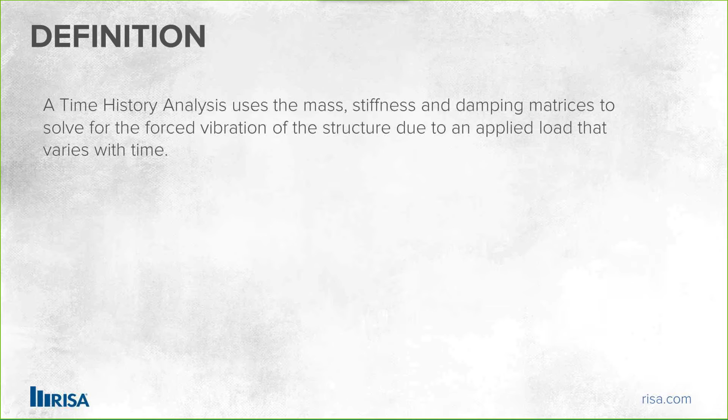It's simple to think about it that way, but as you can see, it'll get pretty complex as we keep going. The examples we're going to be talking about today are two types. One is going to be a dynamic equipment example, such as a turbine. The idea with dynamic equipment is that you've got heavy equipment, and we'll be focusing on the displacement. We're looking at the equipment because it operates at a resonant frequency, so we want to make sure that is not close to the frequency of the structure, so the equipment doesn't malfunction, but also so that the equipment doesn't affect the structure in any way.

We can also think about reciprocating compressors. These are also types of dynamic equipment. And then smaller types of equipment, like an MRI machine. That one would maybe focus on the velocity to ensure that the MRI machine was working properly as the structure responds to it. So there's that type of example. And the main point with these types of examples is that we'll be applying the load to a node or joint. We won't be applying it to all nodes.

In a building structure, you're thinking a little differently, for things like seismic time history. In that case, it will happen to all the nodes for the entire time, so that will be focusing on all joints or nodes in the structure. And when we look at the seismic analysis of the structure, we're going to focus on, does the code check work? Do the detail reports work? Whereas when we're looking at dynamic equipment, we might be looking more at deflections and displacements. The other type of example in the building would be a blast loading example. So I'm going to show you different pieces of this with different examples. We'll focus really in the program so we can see how to use it.

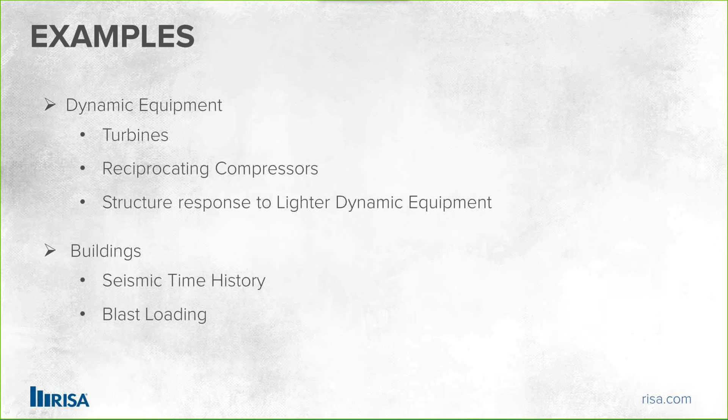So talking about how to use it, it's really easy to apply the time history. There are just some basic steps, and let me outline them now, and then we'll go through these steps one by one. The first thing you want to do is define a time history pattern. We have some predefined patterns in the program, so you don't have just a blank slate. You have some examples, and we also have historical earthquakes that you might want to use. But we also have some quick examples in there for you too.

Once we define the pattern, we'll want to apply those as loads to the structure. As I mentioned, you're going to apply them as an individual load to a joint, or to all joints. So those are the two ways you'd go about doing the loading. Once we've applied the loads, we're going to create load combinations to use these time history loads. They're a new type of load. Just like any other type of load, dead load, live load, we're going to have a time history load. It's an addition to the load combination generator. And for the next step we're going to need to find the natural frequency or fundamental period of the structure. This is the one where I would mention that you should watch the dynamic analysis webinar that I put on, but that one is pretty easy.

We're just going to go through the real basics of trying to find the mode shape of the structure. And then the last final piece here is to run the analysis and review the results. We've got great tools to find the analysis information. We've got some new features that we worked in there to really aid in this feature. So I'll be showing all of that. So let's jump

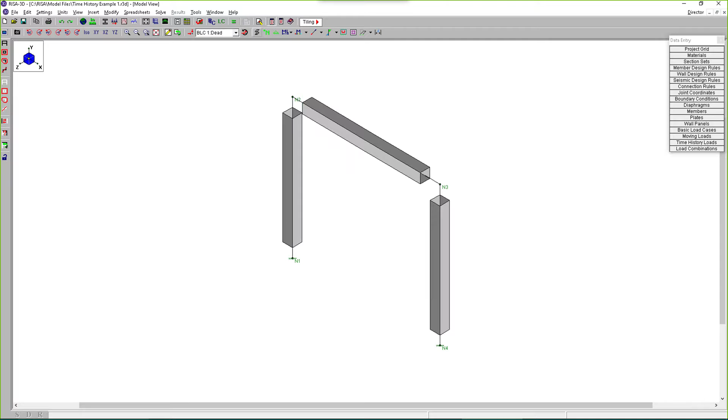I've defined some basic load cases, some self-weight with y -1 for gravity, and I just put a distributed load just to account for maybe some of the tributary dead load or self-weight of the structure that is accounted to this beam up here. But there is already some self-weight for the actual members themselves. That's all that's in this model. You'll see the load combinations just have dead load with a factor of 1. So nothing in the model so far.

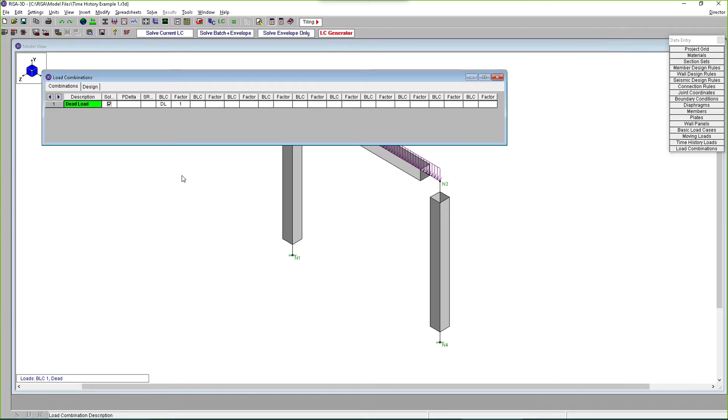What we're going to do here is create a time history function starting out. To do that, you'll see that there's a little icon next to the dynamic icon that says Edit Time History Function Library. You can also go to Modify, and you'll see at the bottom there it says Time History Function Library. You click that. And inside there, you have a laundry list of different ones. I may have a little more than what comes out by default here, but we have a lot in here to start with. So you can take a look around.

Let's just open one just to review what this means. We can either generate one, which we will in a second, but I'm going to view edit just so we know what we're looking at. When I view edit, it opens up an existing one, and it allows me to make changes to it or just take a look. And first thing I can see is it looks very densely packed in here. So this display range helps me target like a plot option, just looking for a small range. So I'm going to go from 0 to 1 second and say apply, and I can see that a little bit clearer.

So that was 10 seconds in total for this whole time history pattern, but I'm going to just look at from 0 to 1 second. I didn't actually shorten it. All I did was change my plot options so I can see the actual pattern better. And what you'll notice, this is time, and then it's plotted over a unitless number here on the left. So we'll determine what this is when we apply the load. This is a sine function, or you can do sine or cosine here from this tool. So there's a couple ways to add, and I will show you how to add a specific.

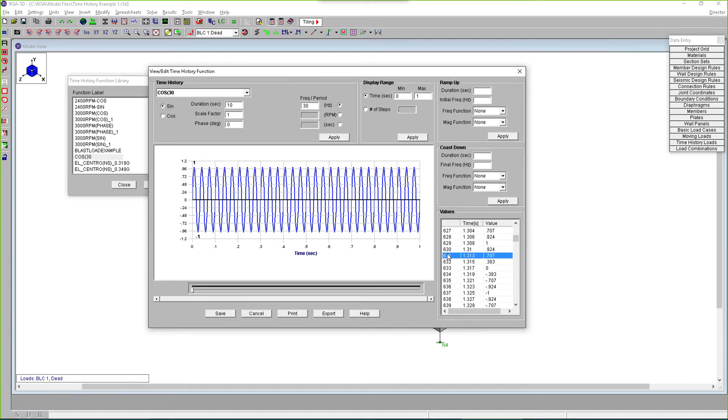You can also print this. If you print this, it'll print out a picture of that function there. You can export it. When you export it, you'll get the values into data for you, so you can actually see what's going on. And the data and the values here, if you scroll down, what you're looking at is steps, then time, and then the value. So I'm going to say cancel on that. And let's create our own for a second here. So just say generate, and I'm going to give it a name.

So we'll call it webinar sine, and I'm going to leave it as sine with a duration, and the duration I'm going to say is going to be 5 seconds, and the scale factor, I'll give that a 1. If you just leave these blank here, this will default to 1, and this will be defaulted to 0. You don't actually need to enter it in. You can tell the program to complete the last cycle, it just finishes off.

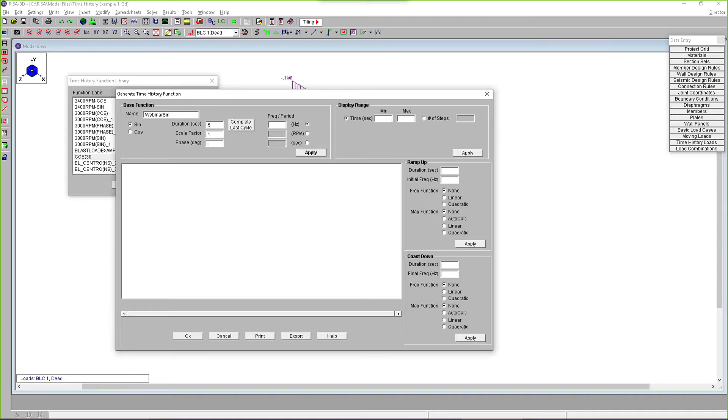I'm going to use RPMs, and I'm going to say 2400. When I say apply, you'll see I get 5 seconds worth of sine curve going through here. It's pretty tight. So if you wanted to really verify that, maybe you go in a little closer, maybe 0 to, let's say, 3 seconds, just so you can see. You can even narrow it down to 1 second just to see that that's happening there. I'm going to go back to 5 seconds just so we see.

Now, the ramp up and coast down, let's apply that so we understand what that is. So typically, if you're in a piece of equipment, it doesn't just start and all of a sudden hit its full speed here. So what we're going to do is we're going to say it takes about 2 seconds for that to actually warm up and get to its full frequency here. And the frequency is going to start at 0. I'm going to say it's going to be the frequency function.

In order to start from 0 to get to its full, it's going to be linear, and you can say apply there. And then it's going to actually go not exactly like this. This is showing us as if the frequency just starts and slowly gets to that. But let's actually think that the magnitude is going to vary also.

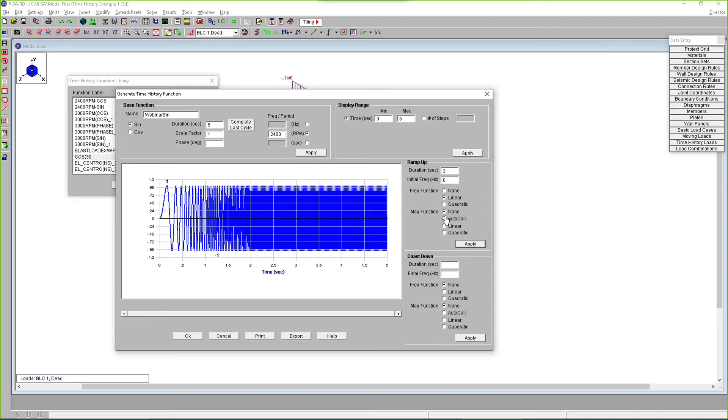You can change that so that it goes to quadratic. If you use the AutoCalc function, that will vary with the square of the function of frequency. So you can use that as well, but it's up to you. You can kind of see what that looks like here. If we use AutoCalc, you'll see it changes a little bit differently, but let's do linear.

So same type of thing for the coast down. So maybe as the piece of equipment shuts down, it doesn't just stop. There's sort of a coasting effect of that. So the same thing we'll do on the back end. So for 2 seconds, and this is just so you see, this is 2 seconds out of my full 5-second duration here. So 5 seconds in total, I didn't get 2 seconds and then another 5. So you want to build that in properly.

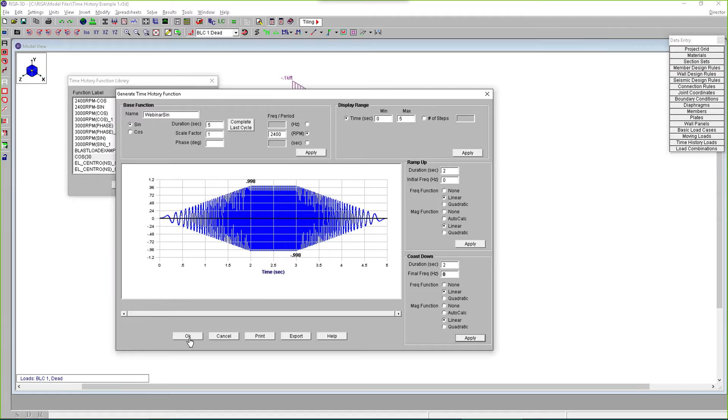And then we'll get to a final frequency of 0, and we'll do this again linear in both ways and apply that. So really my function's only being applied here in full from 2 to 3 seconds, and then it's being turned off. So it's really only running for 1 second at full. So I've got all that in place, and I can just say okay. Now I have a webinar sine listed at the bottom.

In order to create another one, it would be kind of a pain to do that. So what's nice is you can just say create copy, and I'm going to copy this one, and then I'm going to go edit it. So I can just take all of what I just did, just change here. We can see it's webinar sine 2, and this one I'm going to change from a sine to a cosine. And so it'll just be slightly off from what's here. So we're just out of phase with the sine one.

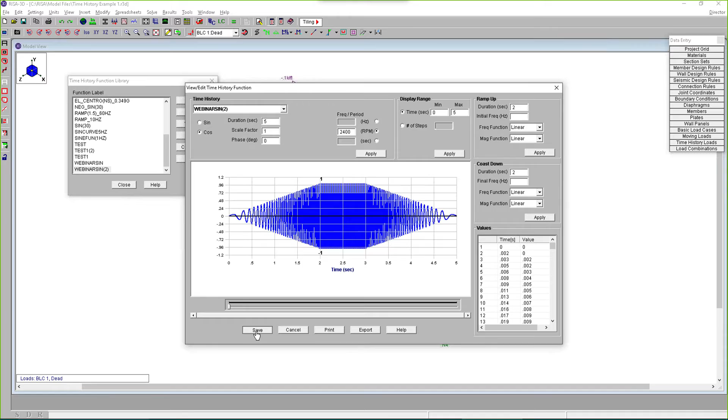So we have cosine and sine, and we're seeing that it's going to be applied directly to the structure here, but just out of phase. So you've got that all listed in here. Everything looks the same, so I don't have to change all that. I'm just going to say save. And now I can apply those, webinar sine and webinar sine 2. Okay, now let's apply this to the structure. So push close and let's take a look.

Now I'm going to just get this off of render, and I'm going to turn off my loads just so we understand what's happening. I want to apply it right here in the middle of my beam. So for example, this piece of equipment is just oddly sitting right in the middle of my frame, but let's just say it applies to N5 only. So in order to do that, I go into the time history loads on the data entry toolbar. You'll see under moving loads, right between load combinations, there's a time history loads.

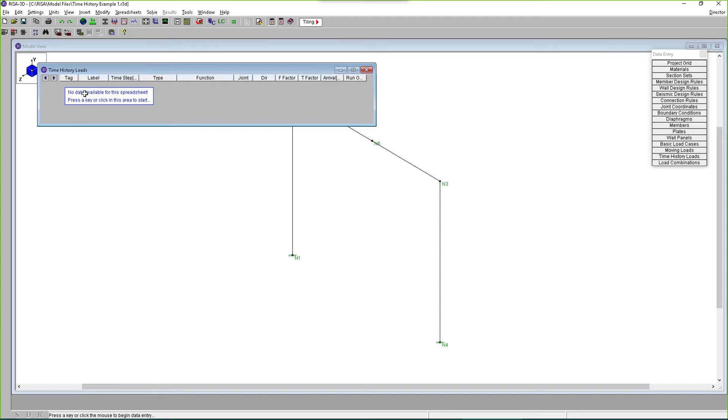That's a new one right there. If you click on that, and then you click on the actual time history loads, it says no data, but when I click on it, it expands and starts creating some data for me. It starts with 2 lines, so it's just a little different than a normal spreadsheet. So you can apply different loads here.

If you just say insert new loading point, you can just keep adding new loading points, and you'll see it just keeps adding and adding, all for the same tag or label. For our case here, we're actually just going to use 2. That means for one time history pattern, we're applying 2 functions. We can change the factors and all sorts in that one pattern, but we don't have to keep applying different ones. So I'm going to go back and delete. I just wanted to show you it starts with 2 lines, and you can add other lines to that.

So for ours here, it's just going to start with a tag. That tag is automatically created by the program, but the label is yours to describe whatever you want. So we can call this machine loads, just so we understand later what we did. The time step is one entry that is auto-calculated for you if you leave it blank, or you can type a number in there. That's going to be based on the mode shape. If you leave it blank, it'll auto-calculate it to be 1/10 of the lowest mode with at least 10% mass participation. So that's kind of typical for a seismic loading.

If you're using dynamic equipment like ours, you might want to use like 1/20th of the operating period to put that number for the time step. What this really is, is just an increment. How often are we applying this time step to the structure? So we'll let the program auto-calculate it. That's probably fine for us.

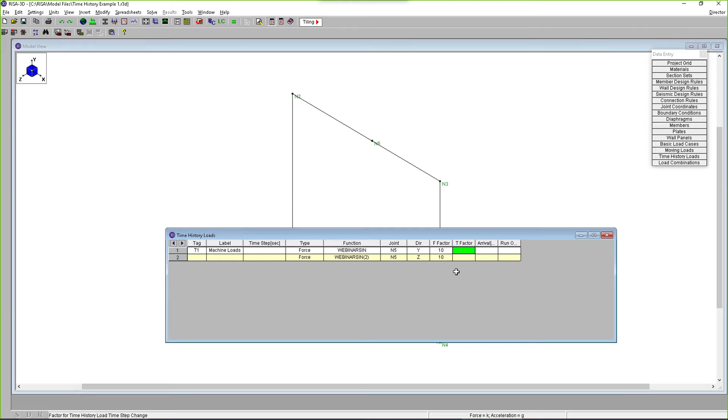Okay, I'm going to come back to the other fields here in the coming up models. So now I have my time history loads created, called T1. Now I want to create a load combination to use that. So going to the load combinations, I have dead load listed here.

I'm just going to push enter, and I'm going to call this time history. And when you go over to the basic load cases, you'll see here that you have a new category. So you can use category codes, we always saw that. You can use basic load case numbers. Now we have a time history load. And that T1 is what's being called up, and I named it machine loads. I can also give it a factor here if I needed to scale it down or scale it up. I'm going to leave it as 1.

And then before I move past that, I do need to run dynamics. So if I try to run this, it says, hey, you forgot to run a dynamic solution. So it'll go right there for me. So I can say, sure, let's go ahead and do that. All we really need here is the eigensolution. So we don't really worry about the response spectral analysis portion. We're just really worried about the eigensolution, and you can pick the number of modes. The program defaults to 3. I'm just going to give it 10 so we can see a little more than 3 mode shapes.

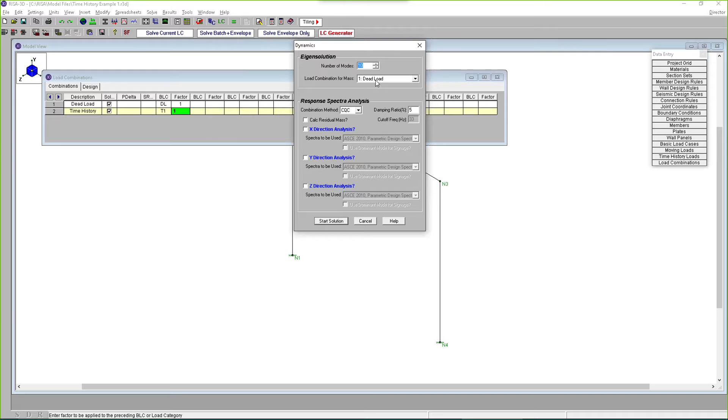And you're going to pick the load combination for mass. So that was why I defined that dead load before we even started. So I have the dead load as my mass, and then I say start solution. It runs through dynamic analysis as a small model, so I can see I have almost close to the 90% participation. So I've got some good mode shapes for my model. And then I can go ahead and run my time history. So I'm going to say solve, and I'm going to run through all my load combinations.

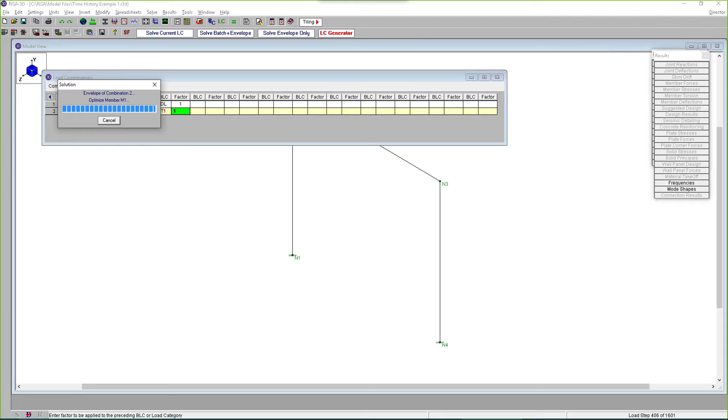On the lower right corner of my screen, you can see that the load step here is pumping through. So it's going up to 1601 as my total, and it's counting all the way up. So we get up to 1601. It tells me I forgot P-delta. That's okay. We'll get past that. And I get all of my load steps. Now what? You've got your time history applied. But in order to understand your time history, the best thing to do to start is to look at your deflected shape or in an animation view.

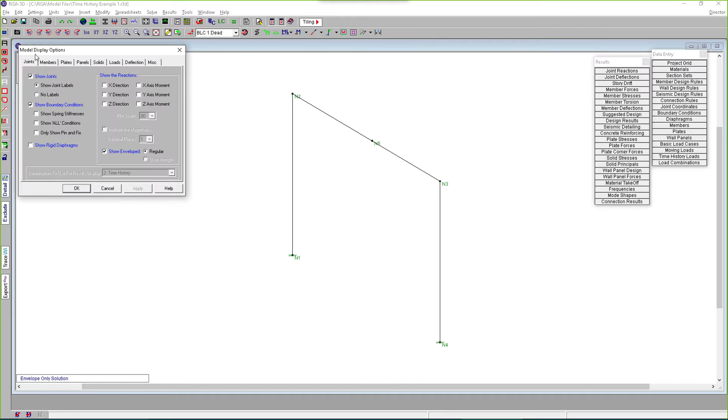So we'll go into our plot options here, and I'm going to go to deflection. And then I'm going to pick that load combination. I can go directly to a static view based on a time step. But before I even know any of that, I had 1,600 time steps. So I had a lot of time steps. I don't really know which one I'm interested in. Let me animate this deflected shape and say, okay. And now I'm looking at an animated shape that I'm going to just speed up for us a little bit.

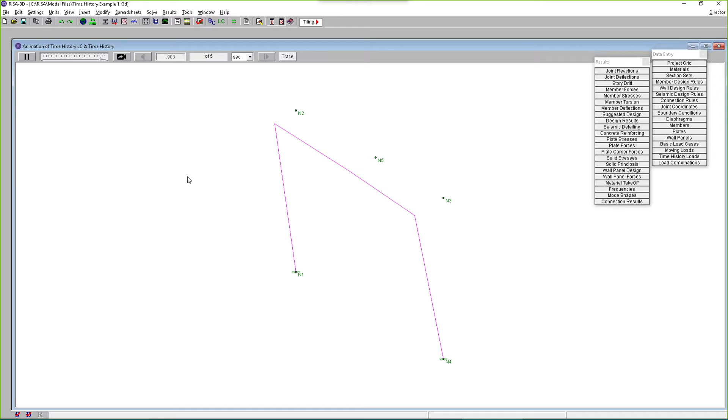So we see that the program is now doing that ramp up here. It's slowly increasing, and then it's going to start moving here. Once we got to about 2 seconds, that was where it was going to be fully applied from 2 to 3 seconds. And right now we're displaying seconds. So it's going all the way up to 5 seconds. We're really close to that 2 second mark, and we can see we're really animated in there. And then it's going to run from 2 to 3, and then it's going to start slowing down as we do what we call the coast down. So we have that ability to look at it in seconds or in steps.

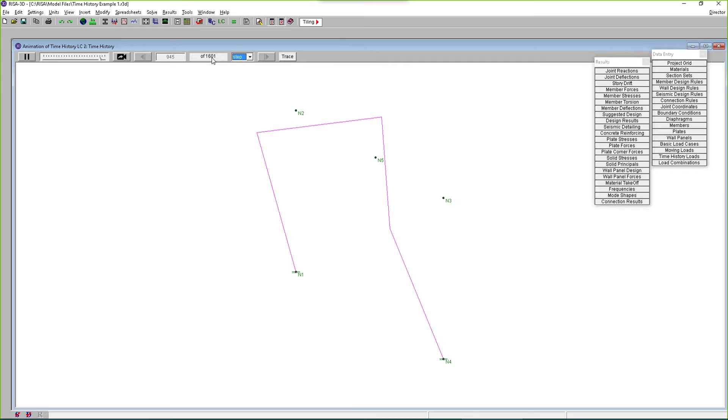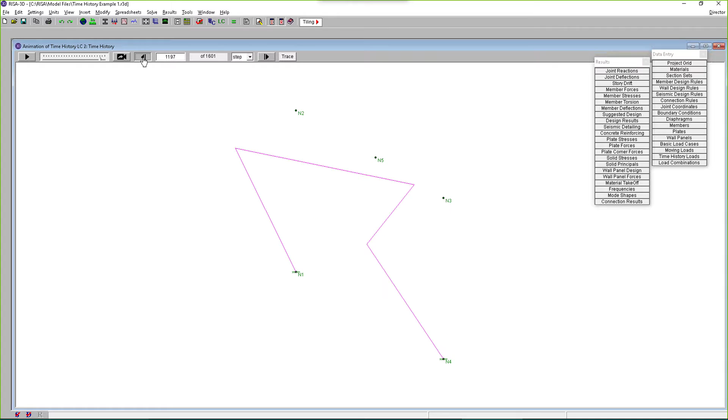You can also see the steps that we talked about. If one is really interesting to you, you can stop it. And that one is an interesting one for sure. You can type one in if you knew. So maybe you said, hey, 1200 was the one I was worried about. You can type it in, push enter, and it would jump to that. You can step through some slowly. I'm stepping between them using these arrow buttons. You can also push animate again and let it animate.

The other thing that's really cool in here is called a trace. So if I click the trace button, I can tell the program I want to put a trace at the bottom of the screen for joint N5.

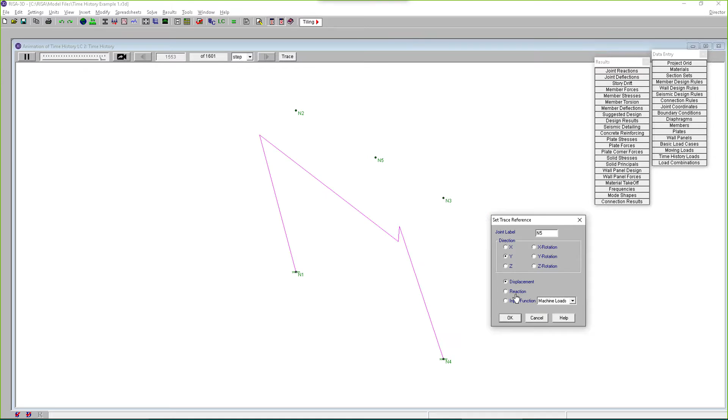That was the one where we applied it, and I want to see it for the Y direction, and then I want to look at it in the displacement there. So if I say OK, I can see it just started over, and it's going all the way from across here at the bottom. We're seeing this little bit of ramp up.

If we want to jump maybe to a faster one, we can go, let's go over to about 1200 again, and we can say play, and we can see it's bouncing through all that. So this trace will help us see all that information. So this is the animated shape here for that.

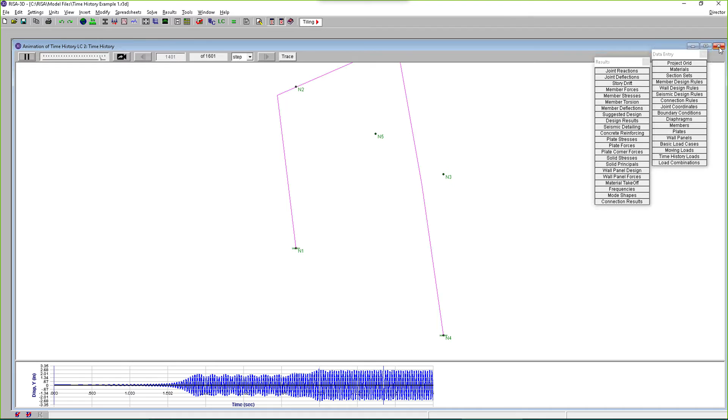What I'm also going to do here is just quickly look at the trace. If you don't want to go all the way into the animated shape, you could just trace a joint by clicking on the left side of the screen. There's a trace button, and you can click on that joint, and you'll see the trace for that joint as well. This works just like we saw earlier, so you can see displacement, velocity, it changes colors for you if you have any acceleration.

Sorry, X was not, but Z was a little bit bigger there. So we're seeing all sorts of information. And then the values that are listed there. So when we were looking at this in the animated shape, we didn't get to see the values. So if you wanted to see the values over time, this is the step, and then the values are listed there for you. You can also narrow this down, this display here.

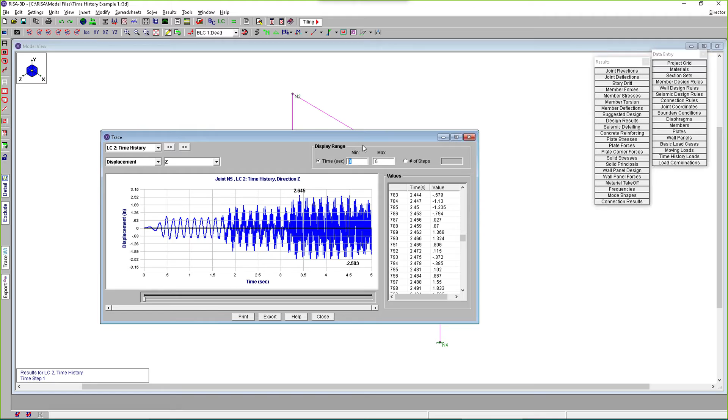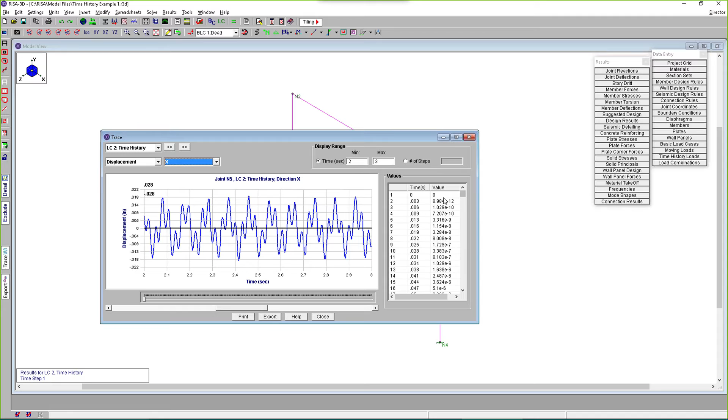So maybe just jump to a certain range, maybe 2 to 3, where you're interested in the displacement in the Z direction or in the Y direction, things like that. So Z was out of plane, so you can look at X and Z and see the different range of this. This can be printed, so if we print this screen, we're going to see all of the different information. We can export the values listed here for us. I'm going to push close there.

The other thing to mention here is when we look at our joint reaction spreadsheet, when we look at any of our joint deflection spreadsheets, what we're looking at is going to be an envelope. This is an envelope solution. So we've got an envelope, and what it gives us as information is what the maximums and minimums are. It tells us the load combination that governed.

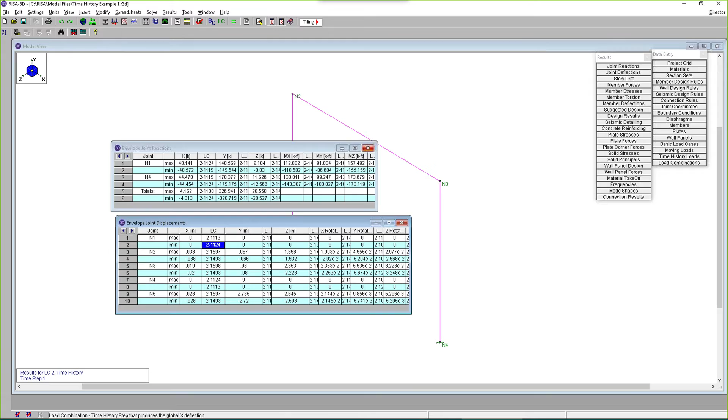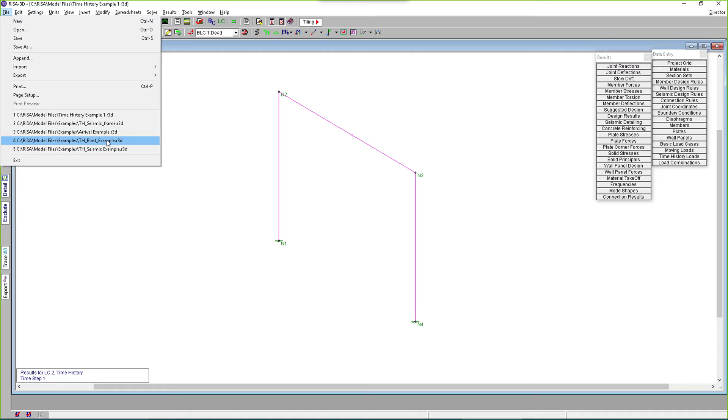So I'm going to probably stick to smaller models today just so we have a good sense for the time that it takes to run the model. A smaller model will help us for quick demonstration purposes. So the next model I want to work on here is called the time history blast one. This is actually in your model files examples. When you install the program, you'll have an examples folder that has models already for you. So this one's a good one to look through. Let's go ahead and take a look.

Okay, so this is just a concrete frame structure, and what we're looking at is a blast coming off of the structure. So it would be basically on one side of the structure. It wouldn't be all of the nodes. It wouldn't be one node. It's not like a piece of equipment that's hitting it, but it's going to be maybe somewhere off the structure, and we're blasting load onto it.

And if you think about how that works, you have to think about how much load would get to each joint. Here we would think about this as tributary area. So if this has cladding on it, now you're going to be seeing force. Force would be associated with how much tributary area it sees based on where that joint is located. So if it's an interior joint, it's got this much tributary area. As an exterior joint, it has a little less.

And the way we've modeled that is using the time history loads here, the inner joints and the exterior joints. So they're going to have a force on them with the time step listed here.

And this, I'll show you here as this function in a second. It's really simple. But each joint has got a load with a direction in the x direction, which is into the structure. And that x direction here has got a factor. So this is instead of just applying the same load on it, this is going to be this magnification factor, which is saying we're applying that magnification of 37.5 to that node.

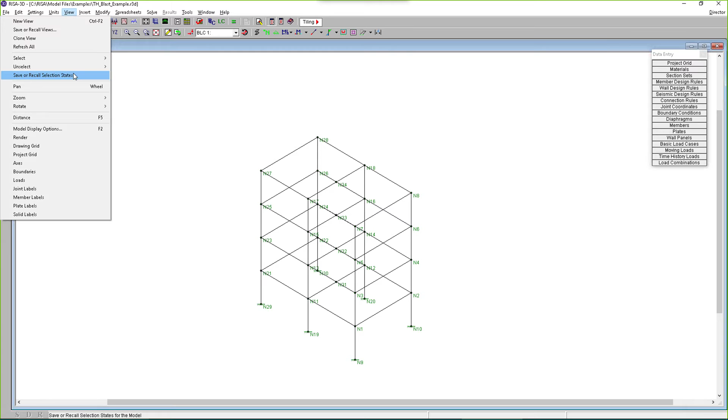Now let's take a look. I'm going to just pull up the nodes we're looking at. So if I go to my view, I saved a state here for us. I'll retrieve the state with just these members. And let's take a look.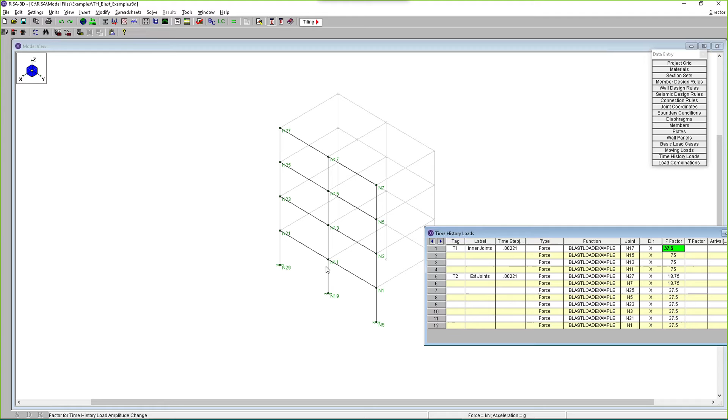So when we look at this here, we have an N17, which is that interior one here. So we're seeing 37.5. So that one, because it's only at the top story, has less than half this load of the N15. And then N13 and 11. So those are going to be adjusted based on their tributary area, and then these exterior joints. So we're applying it to the joints with this F factor. So you see all of that listed there for the F factor in that column there.

Let's take a look at the function that we're applying. So in this one, if we look at the function, I open up, it's an existing function called blast load example, and I can edit it or view it. Now this one is not a sine and not a cosine. This would be one that a user would enter in directly. So I'll show you that at the very end of this presentation. I'll show you how you can enter in your own manual loading here.

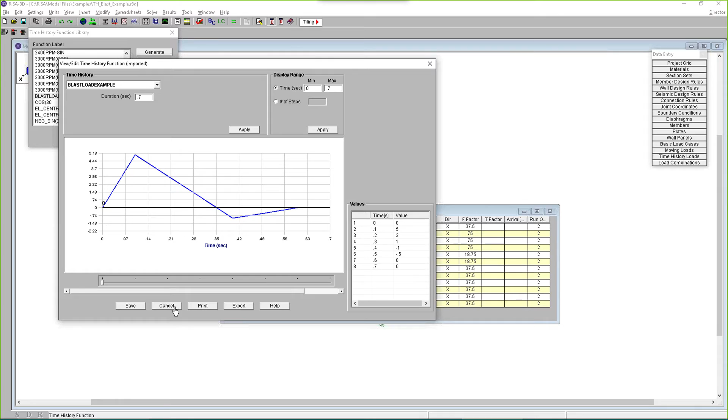This is pretty simple. You can see it's only 0.7 seconds, has just a few variation points, very large in the very beginning, and then it goes into the negative, very small amount there. And you're not going to edit this through this portion here. So if you wanted to, you could create this; it's a text file is what you're going to import. You can export this information as well. So you can import, export. You can print this as well, like I mentioned. I'll show you a print on another one here, but you can do all that information right from this screen.

The other thing I wanted to show you on this is that this is using what we call the runout tab. So if we close this here, I'm going to show you the runout tab. And this is telling the program here that specifically we are going to be allowing the loading to complete. And then after that, we're going to let the structure, using momentum, come back to its steady state or stopped. So as it's running through, we call that the runout.

So this blast in particular was only 0.7 seconds. If you remember, we look at this, it's very short. So what we're telling the program to do is to then beyond that go to 2.7 seconds. So the whole thing is going to be 2.7 seconds in total. And the structure will slowly come to a rest or stopped.

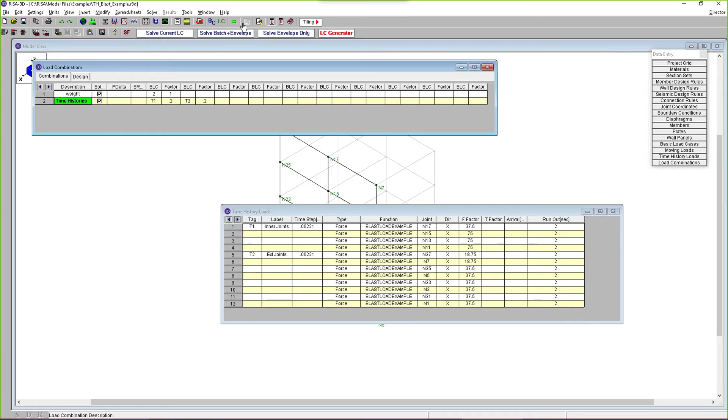So let's see here, I'm going to go into the load combinations, and I'm going to need to run, again, that dynamic solution. So when I try to solve the time history, it's going to say, probably can't do that. Let's see, time history. Solve that. It tells me, hey, you forgot the dynamic solution. You can just run the dynamic solution if you want, but for me, I always forget to, and then it tells me.

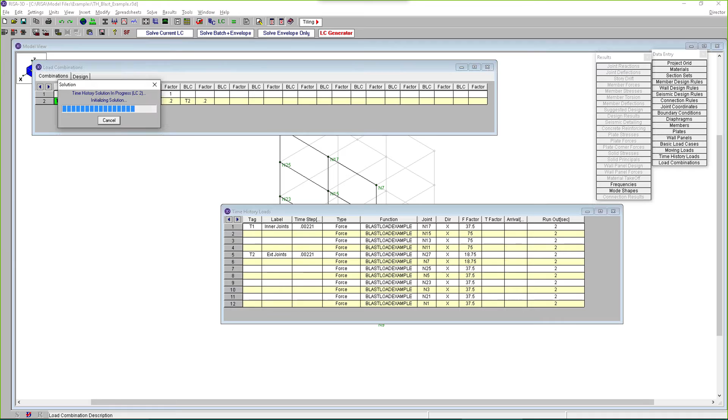So we're applying both blasts, which you'll notice too here is we've got an interior and exterior. We define them separately, though actually we probably didn't have to. So we were using different load labels, just so it breaks it up. But actually everything is very consistent between the two. So it could have all been lumped together. But when you do those tags, they need to be entered in separately here under the BLCs. So we have two of them, they have the same factors, but this might give you some flexibility.

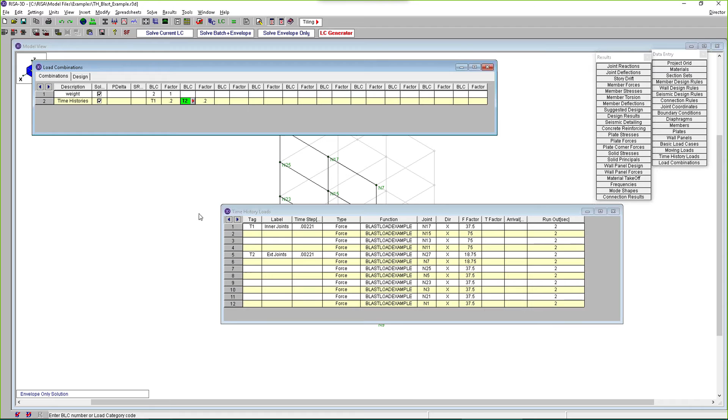Maybe something else is attached if you wanted to adjust things differently. So once you've got that all run, you can look at the actual model here. Let's look at the deflected shape one more time. So we go into load combinations and start with the animated shape. I'm going to say okay.

And I'm going to scroll all the way across here, I'm just making it a little faster. And what's happening is here, that's the first blast. Let's go actually into seconds because that's helpful here. So 0.7, that's when the actual structure got the blast, and now we're just going through the 2 seconds afterwards. So we're going up to 2.698 seconds.

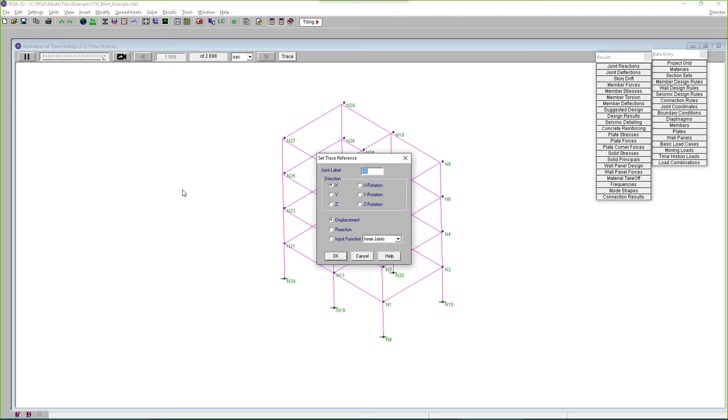Let's add a trace so we can see that a little bit better. So if you go to N27 as a joint, it might be helpful to see. We're looking in the X direction displacement. And I can see the starting off point is going to be high, and then it's going to be scrolling across and it starts to kind of slow down. So you can see that it gives you that different piece there.

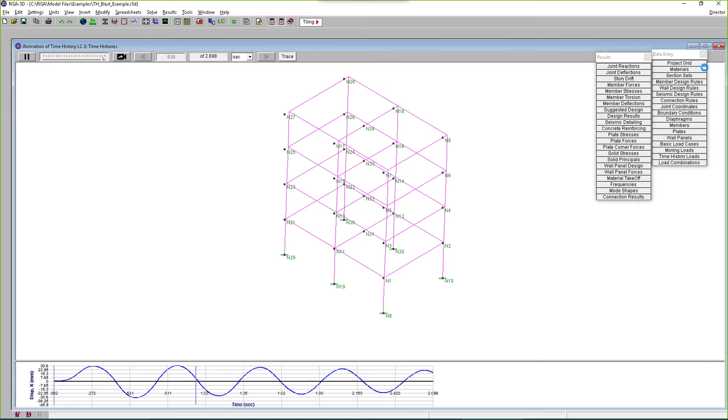Now, this model here, we close this up. This model is actually a good one to show. Let's go ahead and turn off our nodes, and we can send this one out for an animated shape. What's nice about this is, like I mentioned, the animated shape is everything. It tells you so much about the model. So it's really important to be able to see this, not just in RISA.

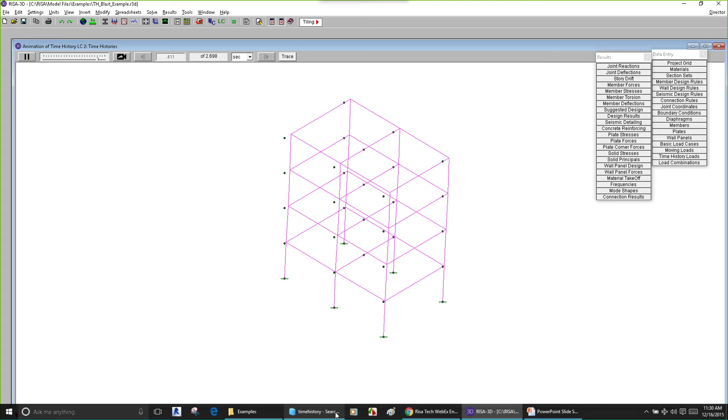So we have an ability to send the animated shape out, so you can export it right to a file and watch it outside the program. Let me go ahead and show you that. Let's pull up examples, and I saved it right out here. We had called that time history. And if I open this up, you can open it in any viewer. It's a WMV file, and you can see it's just showing us this animated shape.

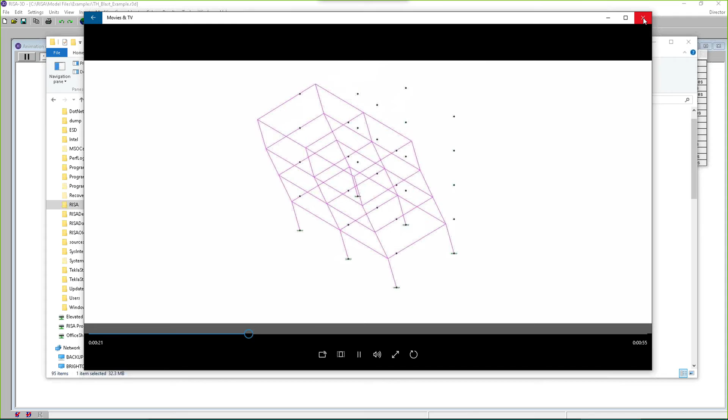So this is great for presentations outside of RISA, but it really helps you understand what is happening in the structure if you can see this. So this is a great feature and newly added into RISA. So we've got that. Let's close that.

The other thing I wanted to show you is we can export things right out of the program too. I showed you can push the trace button, and when you click that, you see this trace information. What you also can do is click on the export button, and this allows you to export different pieces of that. So it's going to be tons of all the information we talked about. There's so much information you've got.

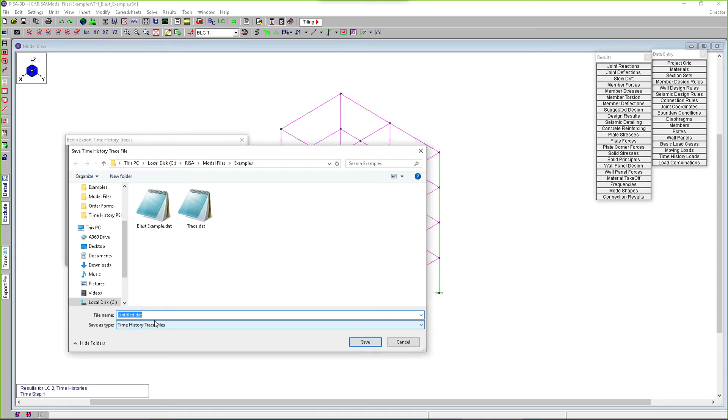You've got displacement, velocity for each joint, for different directions. You can send it out for a range, depending on what you're looking for. If you want to work with this in Excel, or look at this in a data file, you can export that. Let's call this export example. And it just quickly happens there. And then open that up, and we'll just take a quick look.

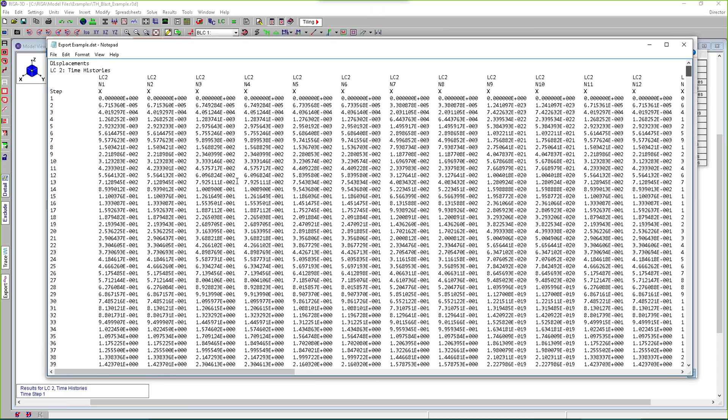It's not super pretty because it's a lot of data, but it shows you all the power of what you can see. You could have narrowed that down. It might be helpful for you to look at certain steps or certain time frames, but it's a lot of information. So that can all be exported as well.

Before we jump into the next model, I just want to quickly show you some information. That model I was just working with, I was doing a lot of stuff with damping. Damping for that model would have been important, because as we let the model settle, the damping would have been really important in what we were seeing.

So inside of your global parameters, you've got a setting called advanced, and under advanced you have the time history section. Right there, you've got two options: modal superposition, or the direct integration method. So modal superposition, as its name says, is defined by the mode shapes.

So this is a real quick way to tell the program what kind of damping you want to use. Maybe 2% we have listed here; that was my last model. Maybe 5% would be more like a default setting. But this allows you to just click to create one damping percentage based on all your modes for the entire model and all the nodes that you have there.

So this does require that you get a sufficient amount of modes to capture the response of the structure to the given input motion. But you can just do that. That's kind of a quick, easy way to do it, and it's very fast.

The other way to do it is using the direct integration method, and that relies on the Hilber-Hughes-Taylor method. So in that way, you'd have to enter in this alpha value, which is going to be your single integration constant alpha, which varies between 0 and -1/3. If you put a negative value, it will tend to damp out or dissipate energy from the high frequencies to help response relative to the time step.

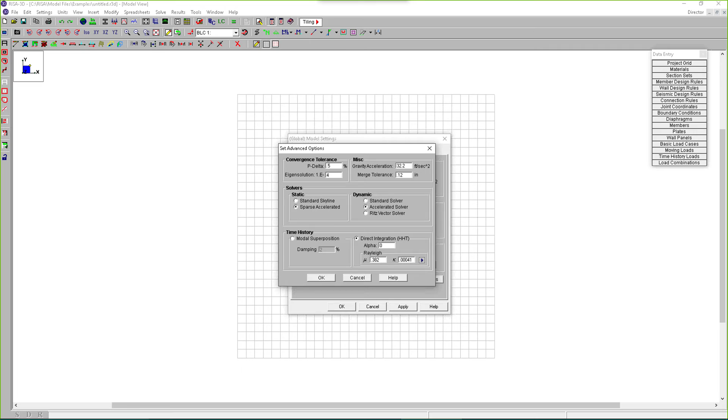So for those terms, you enter in a target damping that you want to get, and then a frequency range that you're looking to get close to, and from there it will calculate it automatically for you based on those values. So that's a way to get started if you want to use the damping for either direct integration or the modal superposition. Now, you can also just leave that as more of a default value.

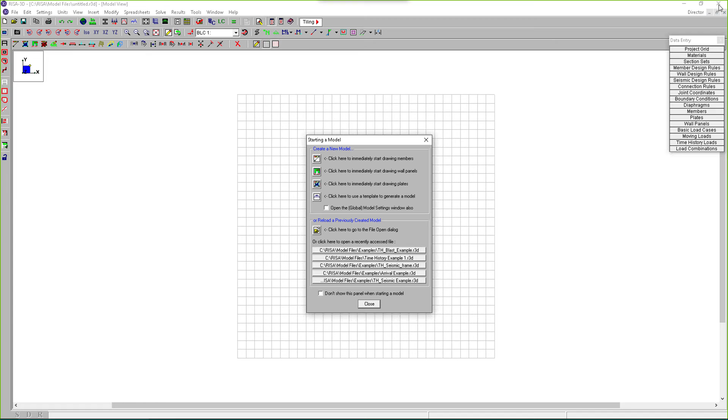I'm going to get out of there and jump back into another model. So beyond that damping, I'm going to talk about the arrival that I had here. I'm going to open up this arrival example. Okay, so for this example, it's just a simple frame I built. I'm applying maybe equipment loading on this frame that hits at different points. Maybe it's some kind of a crane rail where the equipment moves across the structure.

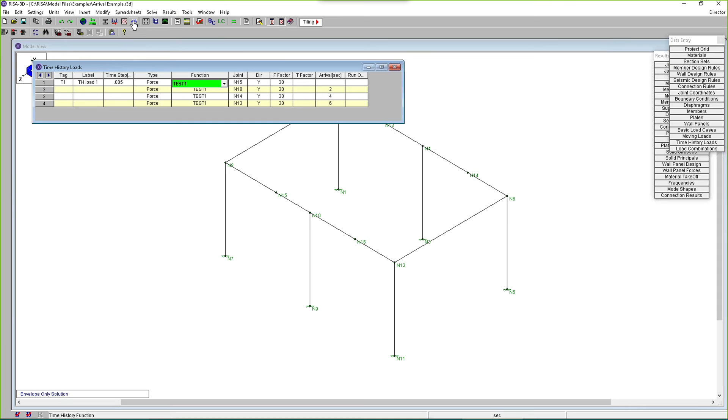So the way you can do that is using the arrival. If you look at the arrivals here, you'll see that you have the ability to set a starting point for that load: started at 2 seconds, 4 seconds, 6 seconds. And the function I have in this model, if I open that up, is test1. Really creative name I made.

And this is just a simple sine curve. I've got it running for a total of 8 seconds. Let's actually increase this so it's a little faster: say it arrives at 1 second, 2 seconds, and 3 seconds. So we're going to start with N15, then 1 second later another 8 seconds will be applied to N16, and then a second beyond that we'll get N14, and then N13. So it's going to move around.

It's not really with the traditional saved results like we do other static results. So if you ever open up a model and it doesn't ask you about that, it's probably because you haven't made any change to the geometry of the structure. So it's just remembering all of the dynamic analysis that you did prior.

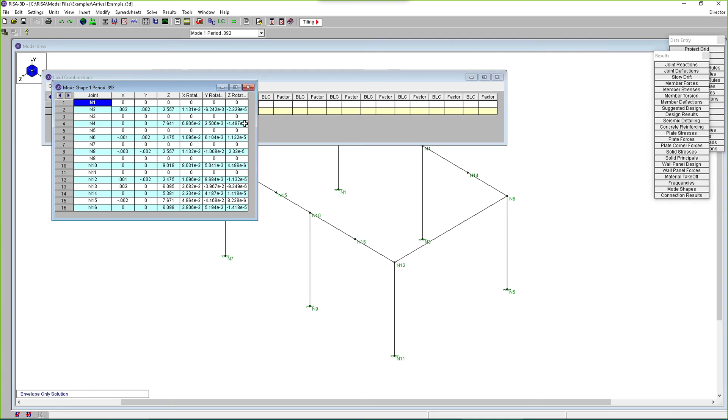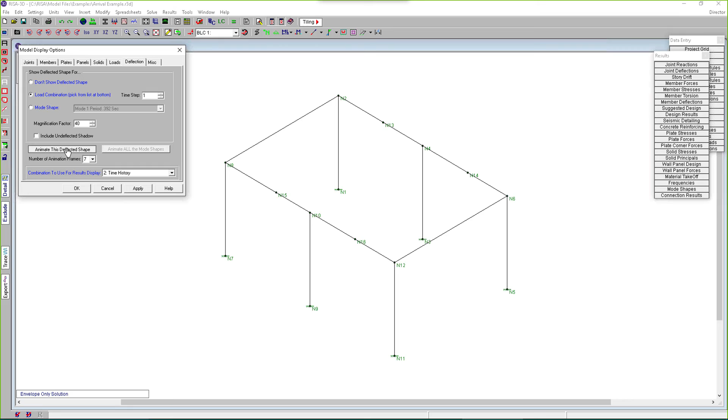If you wanted to double check that, you could take a look at your mode shapes and your frequencies listed here. They're at the bottom of your results spreadsheet, and you can see that I did already have those saved for my model. So when I've run that time history for this one, I can go ahead and go into the deflected shape, and I can look at the load combination, animate the shape, and say okay.

I'm going to just speed this up just a little bit. So we can see N15 is really feeling that I'm just applying some vertical load in that vertical frequency of that sine curve on there. And then as we go, it goes a little bit longer here, going to the first second. You should see that the second one starts moving, and then the third one starts moving as we get closer. So every second, I'm starting to add that load.

So this would help you stage. If there's a way that you're staging to apply these different time histories, that would be how you use the arrival. And this is a really great tool for that. So we can see all of those. If you wanted to, you could trace what's happening in this structure. Let's look at maybe N15 or maybe N10, since N10 is kind of on the path of that. We can look at N10 in the Y direction, and you can see that that's happening there. Okay, so we've got all of that listed here.

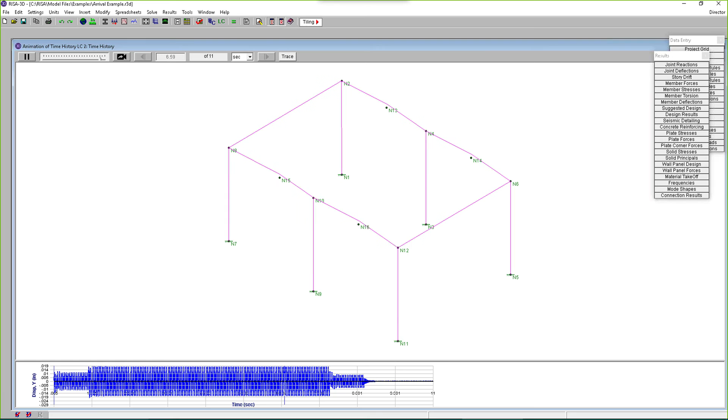Let's go ahead and go into a seismic frame example. I'm going to go into File, and I'm going to open up my seismic frame. This is also a model that you have in your examples folder, so if you ever wanted to take a look at it, you can see this right there for you. So this one, if you look at the time history loads, is going to be based on an earthquake. So this is the El Centro earthquake. I will show you exactly how you would have built this one, just after this slide here. I'll show you how we import this function directly into the program.

So this function is definitely a little bit different than what we saw. So this is 349G. This is going to be an earthquake. It's not even like a sine and cosine. It's not like our blast loading. This is real complex. We're seeing a lot of different values happening. We see that going up and down real fast, and we're looking at 53 seconds for this earthquake to happen. You can narrow that down if you wanted to see a little closer at what's happening in there, but you can really see it's bouncing all over the place. So this would be one that you'd want to do manually and import directly. So now I'll show you how to do that.

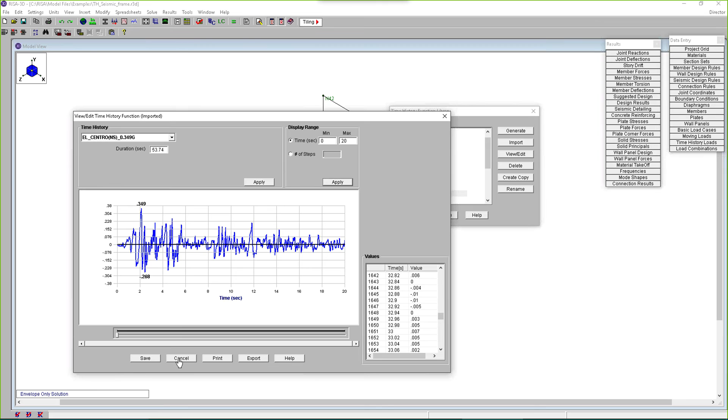Since this is an earthquake, it's going to be applied to all joints. It's going to be an acceleration, and its time step I listed here as 0.05. I think that's a little small, but the program does give me a little message when it is too small and too big. It won't really hurt my model too much right now, but it will give you that little message saying you probably want to go and change your time step for better accuracy. This one takes a lot longer, we've got a lot of loads applied to it, so I made this a little larger, but the program does warn you when you go out of that boundary for the 1/10 of the lowest mode.

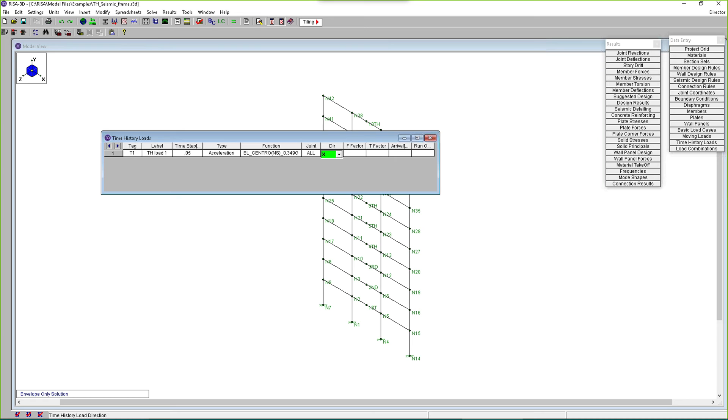So we've got the directions listed here, and I didn't apply any factors. This is all going to be directly inputted, since this is direct from the earthquake. So the piece we want to look at is that if I click on the deflection and I look at the load combinations and the animated shape, we can see a lot of how this structure works.

It's really bouncing around. It's got a lot of different shapes going on, and it would be good to see if you wanted to understand a little bit more about the joint deflections, maybe find out exactly one that you'd want to see, because we go all over the place. I'd love to show you here.

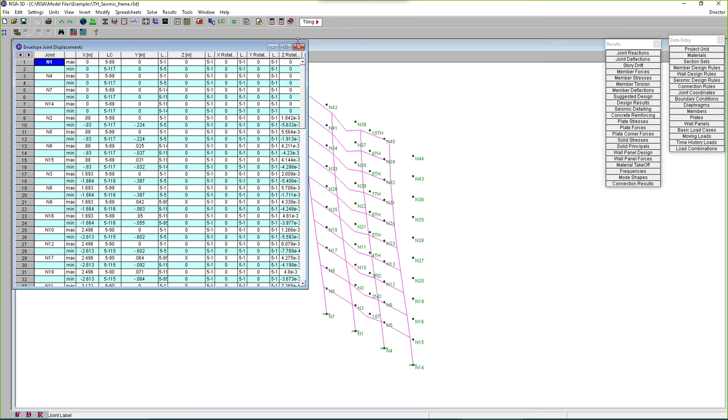Let's look at the design results in this one. So we have really high design results. Load combination 5 is what I ran, and it looks like even in the early load steps, we're seeing some high problems here. So if we look back to load step, we're going to go back to step and just go to 6, for example. That was our first one, and push enter. You can see probably having problems in the center here.

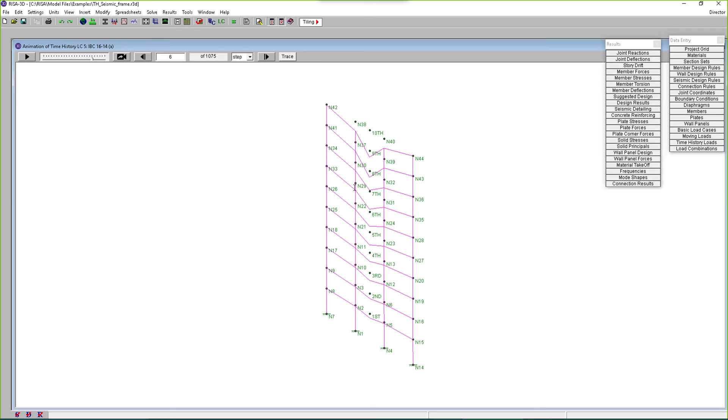But you've got the ability to really work with the design results and see exactly which load step was causing any problems. So I would have to size up a lot of these members. Shear is even an issue in some of these models. And the other piece I really want to show you too is the design results. If we look at these design results, it's important to see we have a detail report that's been altered for this as well.

I actually might need to solve this again so we get a really good one. So I will go ahead and solve this load combination one more time. It'll just take a second. I have 1,000 of them, so not that bad. It's running through 1,000 load steps, and we're going to look at the detail report. And what we've added is an envelope detail report. So it really helps you to see what's happening over all these load steps.

It will also create an envelope detail report of load combinations for you, but for the load steps, since there's 1,000 different applications of load happening during those load steps, you want to make sure that you can pinpoint which ones are the worst case. So using those results to really get to what happened and why it caused any failures.

You'll also see I use different types of loadings. I just put straight time history in here, but I also combined basic load cases with my time history. You can use your load combination generator to create some of your standard loads and then add your time history into it if you needed. So I just added some gravity and replaced it with an earthquake load type structure for this model. And so we're almost coming on that here. We're about 700 load steps.

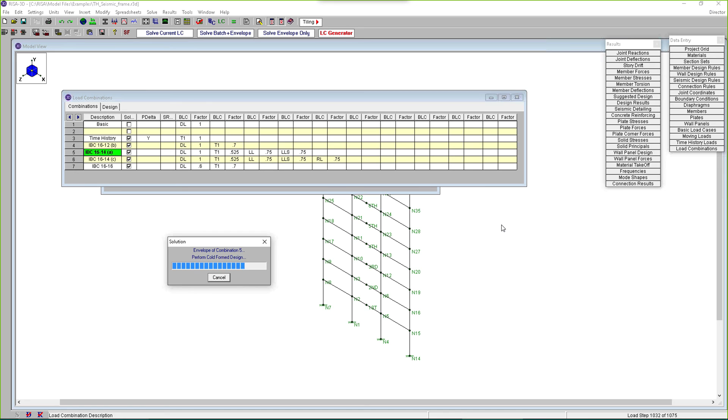You'll also notice that we are applying this to all joints. So it will take a little bit longer when you go to all joints versus just a single joint. When you're just doing a single frame with one joint, it's pretty easy to do. And so that's why we're seeing it a lot faster, and this becomes a little closer to reality when we're going up to 1,000 on all joints. I'm going to solve this in just one more second. There we go. And I'm going to say OK.

And let's go ahead and look at our detail report from our design results, and I think I had sorted that worst case. So sort and absolute max. This is sort of our worst case one. We can open up that detail report. And in the detail report, we've got a variety of information. First of all, on the top it says envelope. So it's going to be all that's happening in that model for all those load steps.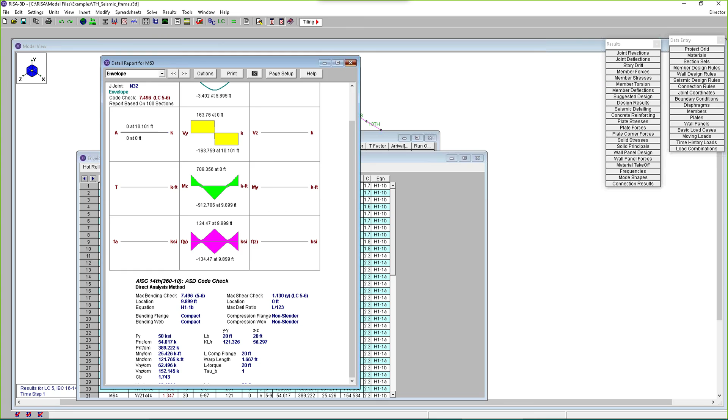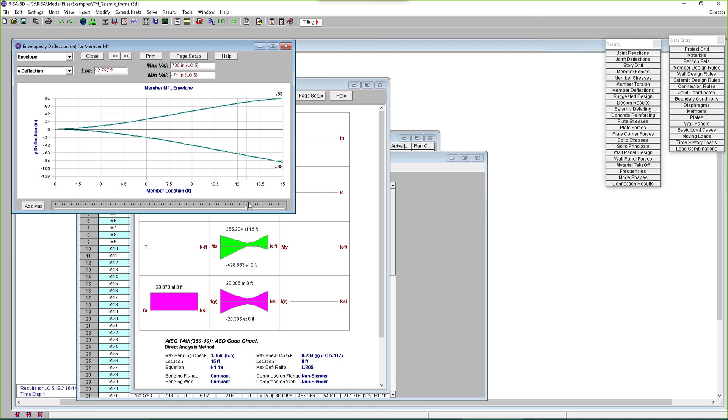Let's just renumber these a little bit. And if we look at this one, for example, you might see ones that are a little different. You can see when the deflection varies, as load combination varies here, the different time steps, you see a minimum and maximum and the contribution for that. So you've got a large amount of information in this detail report that's all brand new. And this calculation is based on this load step right here.

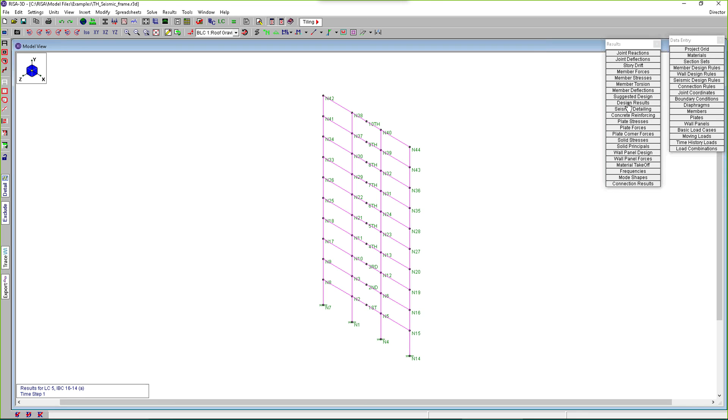And again, we can see all the information can be exported directly out from that detail report, from that design results. Just to point out too, this is in every single spreadsheet, you're going to see this load step. It's a really powerful tool to see all that.

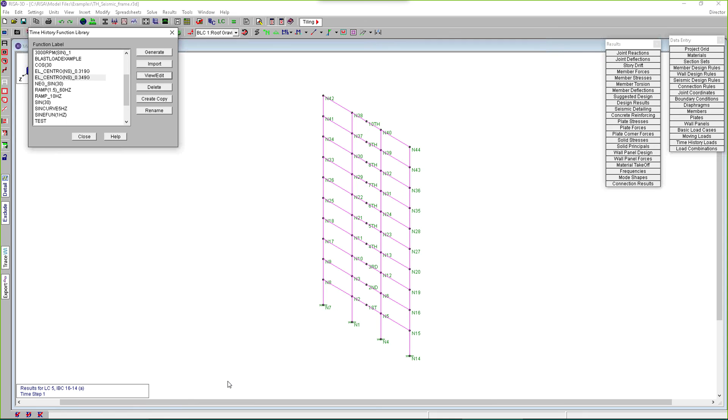Okay, so now how did we get that BLAST example, the El Centro? How do we get those? Those are really, really difficult, and how do we end up importing that information? So to do that, let's take a look. I'm going to just jump right out of here, and I'm going to go back to my slides. There we go.

Okay, so for example, you can go on to the website, which is PEER, or the Pacific Earthquake Engineering Research Center, and that's their website. I just went up there and found it. They have a database of tons of records for different types of earthquakes. So you've got a laundry list of different information. What you're looking at here is just a snippet of it.

And this is actually Newport Beach. So right here in our backyard, the Northridge earthquake in '94. What it tells us here is it's giving us all this different data. We need to get that into the program. So to do that, you would create a text file very similar to this one here that they give you in that format, and you just add a little bit of information.

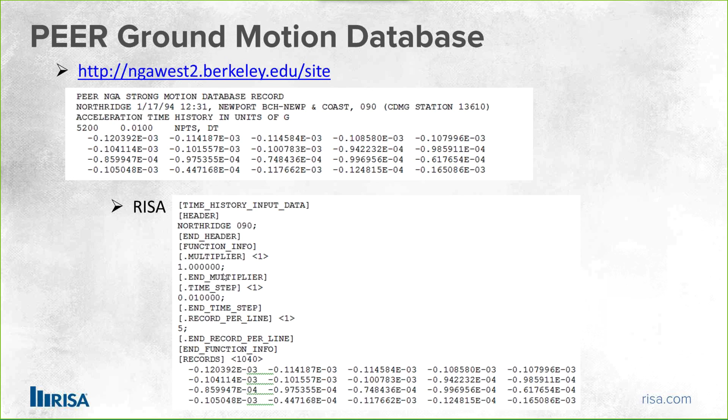So the top information is just going to be what do you want to call it? Northridge 90 would be what we'd call it, and that's listed here. You've got what's the multiplier? So if you have any multipliers, you can do that inside of the text file. Like I said, you also could have just done that right in the T factor, so you can adjust it out in the RISA program as well.

The piece of information that comes off of here is the time step. That first piece of information really is that time step, which is going to be in seconds here, 0.01. That's your time step listed in both there. The next piece of information is the records per line. So you see that in both, you have 1, 2, 3, 4, 5 records on there. And here we also have 5 records. So we're just saying records per line.

And then the next piece is going to be how many records. That's how the PEER information comes out, as 5,200 records. And then we have it listed as number of lines. So we basically take that 5,200, divide by 5, and that's that number right there. And then all you have to do is copy all of that data that they give you and paste it right into that file. So you have it all listed in there for you.

You can build this from scratch. Like if we were doing that BLAST example, it would be just grab one of these, copy it out, and put it right inside; I think we had maybe 5 or 6 data points, super small. When you're using this much information, 5,200 records, that would be really difficult. So you just want to be able to copy it right out of that text file. And so it becomes really easy to take the information you're getting out of the databases and put it right into an input.

So you have a folder inside of your program that's going to be the time history folder. That would be where you store it, and then RISA can find it when you open the program. The only trick is you have to close the program and reopen it so that you see this new item in here. But you can also find all this information right in the help file as well.